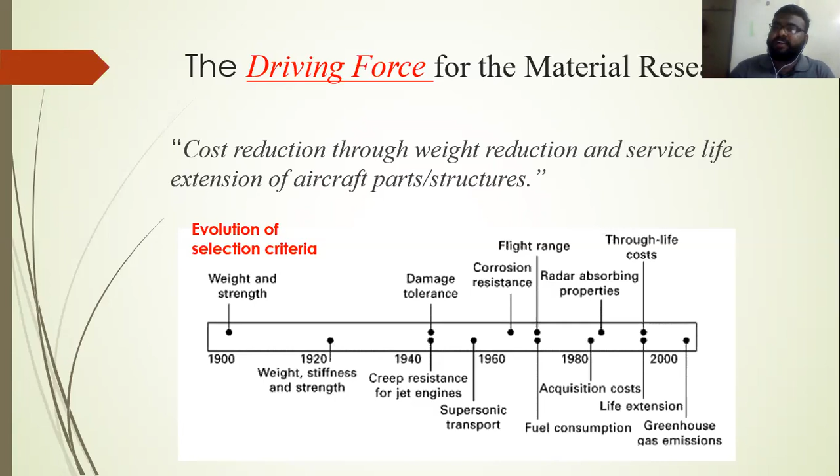So today's outline of the presentation is: we are going to see the importance of the material in several perspectives - the perspective of the environment, the perspective of the performance, the perspective of the design, or how the material is correlated. Later we are going to see the brief history.

So from when, right from the Wright brothers, what happened and what made them choose alloy, what made them choose the materials for their aircraft, and how it evolved from wood to right now Glare or CFRP being the lead material in manufacturing. That we'll see in the brief history.

Later we'll see the current scenario - what is happening right now, and what is a very happening material in the aerospace industries, and what makes them happening, or what made them an important alloy in the aerospace industry. That we will see in detail in the current scenario.

Later we'll see the future trends - what is going to be in aerospace materials, what are the interesting materials going to come for the aerospace industries, and what are the interesting characteristics also. That we'll see in the future trends.

And later the last topic we'll see is challenges or research scope in materials research. That is very important - what are the available challenges in the material which is currently in use. That we'll see in challenges or research scope. That will be very useful for young researchers or faculties who are going to start their research in materials. So this is my short outline of the presentation.

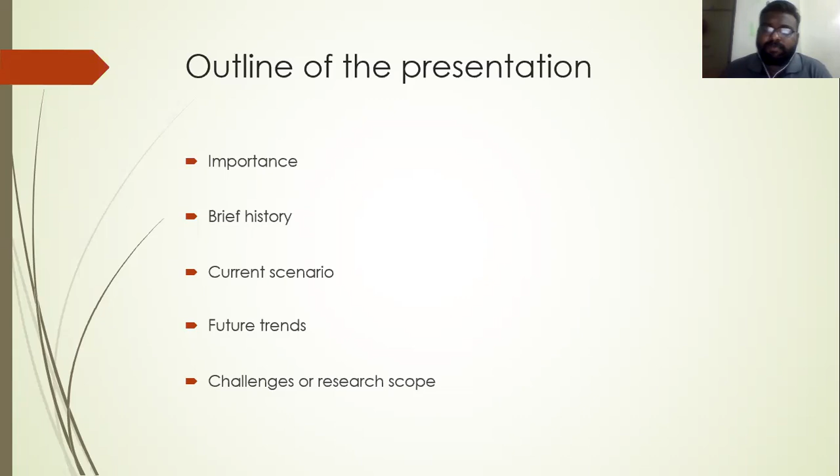As I said before, right now we'll see the importance of the material in the environmental aspect, or the perspective of the environment. As per the Intergovernmental Panel on Climate Change, a recent shocking report says by 2050, about 15% of the entire global greenhouse emission is going to be contributed by the aerospace industries alone. Just imagine, 15% is a big number.

Then we must feel responsible to reduce that number, because the material should be developed - a lighter material should be developed, a higher operating temperature should be developed - and in such a way we have to reduce this. For example, a reduction of 1000 kg may lead to 1.1 to 1.5 percentage reduction in fuel consumption. Just imagine - weight reduction plays a major role.

Similarly, by increasing the operating temperature of the current alloy in use by just 50 degrees C, we may end up increasing the efficiency by 1.0 to 1.3 percentage in engine efficiency. So the main tool to reduce this environmental effect is by reducing the weight as well as increasing the efficiency. Increasing the efficiency can be directly contributed by increasing the operating temperature of the material. So this is how material and environmental aspects are correlated.

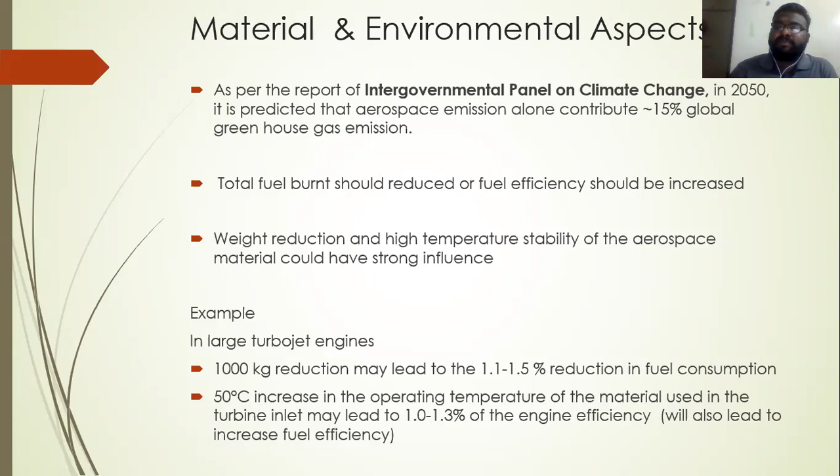Later we'll see material and performance. Obviously, material performance immediately brings the engine into picture, and if the engine comes into picture, thrust comes into picture. So the main criteria for increasing the thrust is one, weight reduction, as well as second, operating temperature - same thing we saw in environment, here also it matters a lot. So materials used in turbine blades should withstand high temperature, and obviously superalloys play a major role in this - nickel chromium superalloys play a major role in this.

Similarly, titanium is also used. There are two parts: one is the very high temperature part, and another is the cold part of the engine. In the cold part, where the operating temperature will not exceed 400 to 450 degrees C, titanium will be used, like for example the compressor blade. For the combustor, in that high temperature region, nickel superalloy can be used.

Similarly, single crystal alloys are happening right now in the turbine blades. A normal metallography microstructure of the material consists of grains and grain boundaries, and there will be several millions of grains and grain boundaries in a normal turbine blade.

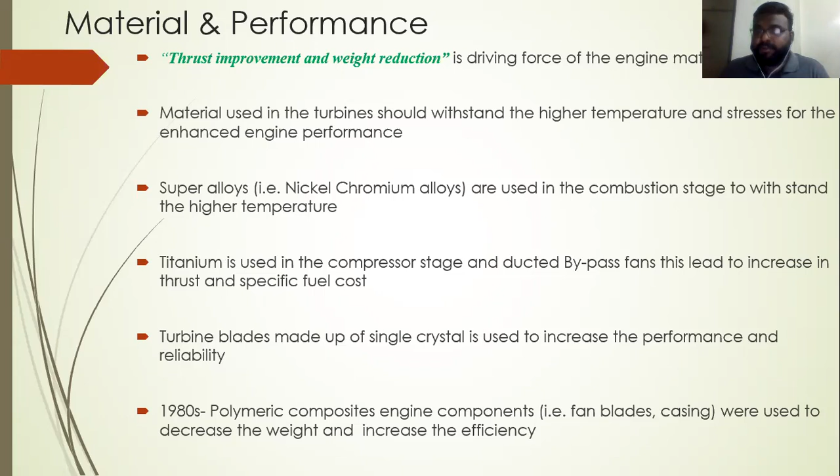Later, by the 1980s, polymeric composite engine components came into picture, and that decreases the weight and increases efficiency. Now, material and design - how are material and design correlated?

For example, if you want to design and develop a wing, you have to select a material which has both good tensile and compressive stresses. Just imagine, when an aircraft is taxiing or on the ground, the lower part of the wing will experience compressive stress due to the weight of the fuel and the cantilever effect - the wing bends towards the ground, so the bottom part has compressive stress. Similarly, during flight, the bottom part experiences lift, so the bottom part will experience more tensile stress, and the upper part will experience the vice versa.

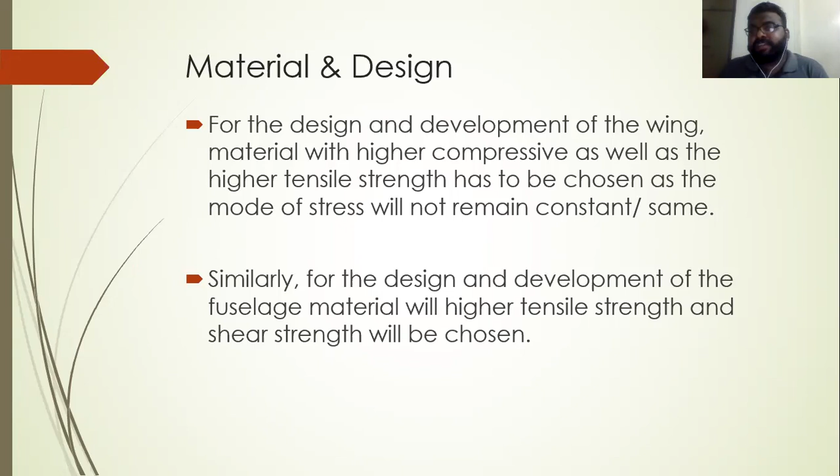So during the selection of the material, you have to keep in mind that the material should have both higher compressive and tensile stress. That's how material is also interrelated with design. Similarly, in the fuselage, the material should have higher tensile strength and shear strength, as well as really good fracture toughness. This is how material and design are correlated.

So let's see a brief history about the material. As I said before, by 1903, the Wright brothers used wood and fabric cloth because their engine capacity was very less - they could not afford steel or aluminum during that time because of the engine horsepower, so they used only wood and fabric cloth. By 1915, the Junkers J1, the first all-metal aircraft, was introduced, and the metal used here was steel.

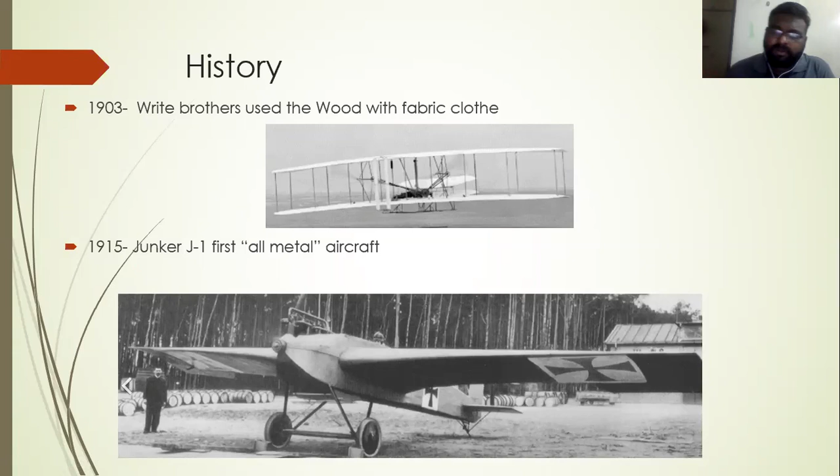Later, steel had a very important drawback: corrosion resistance. To overcome the corrosion resistance issue, the first de Havilland Comet, the first commercial jet airliner, used aluminum in a significant amount in 1949. Right from that time, aluminum has become a major material in the aerospace industry.

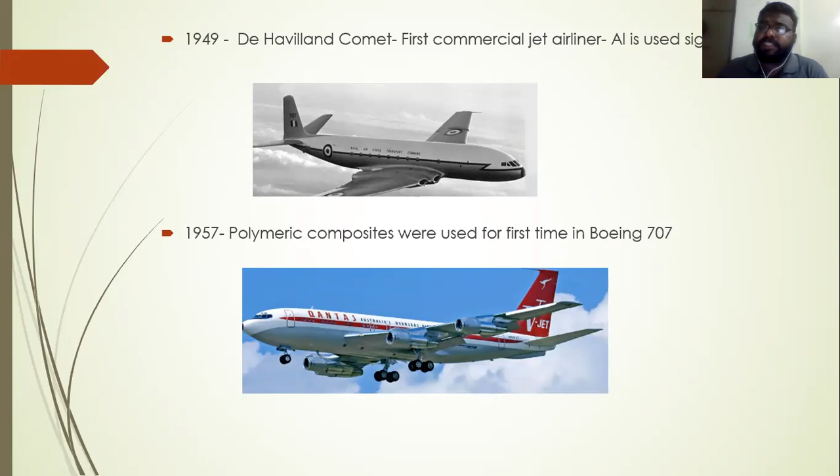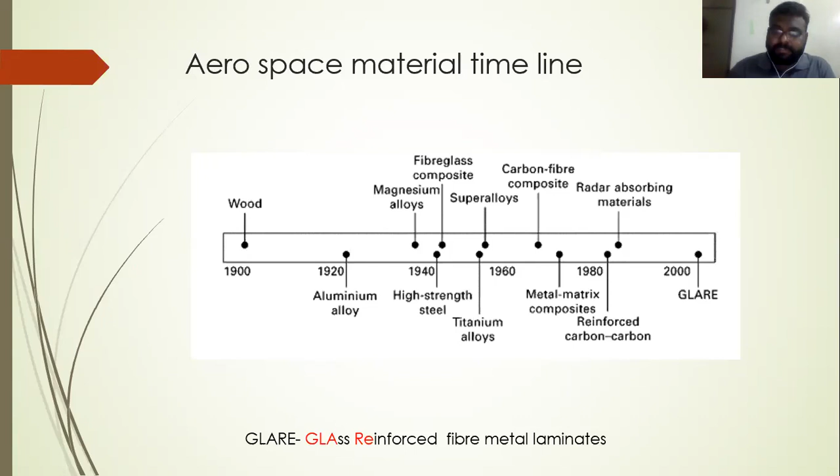So this is the current scenario, what you're going to see now. Current scenario is nothing but composite material. Just by seeing this one graph, you can clearly understand how composites have gradually increased and reached the top right now. For example, in Boeing 747, it's less than 10% composites - maybe around 4 to 5%.

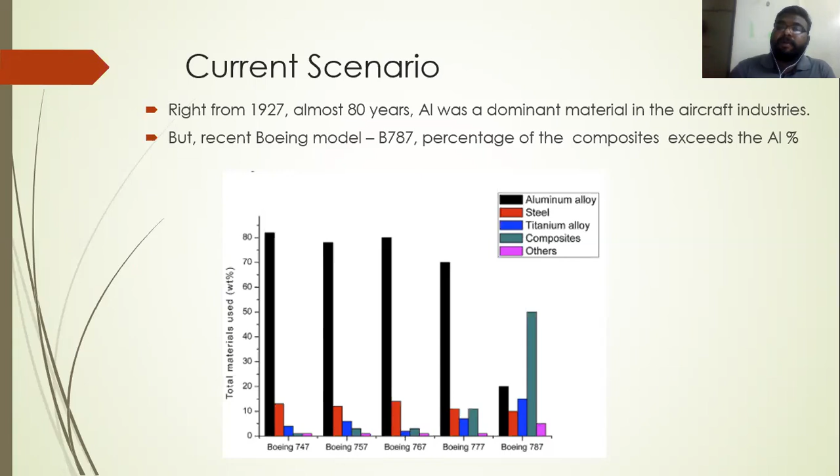But right now in Boeing 787, a recent vehicle launched by Boeing, also called Dreamliner, it's about 50% composites - it's made up of composites. And similarly, you can see the aluminum, how this is dropping. Right from the Boeing 747, the percentage of aluminum is dropping, and right now composites are happening and are a very important component, a very important material, for the aerospace industries. So this is also another solid evidence for that.

Right from the DC-9 in 1965, composites have been in practice - they've been using it, but it's gradually increasing, and it has reached right now in Boeing 787 and the Airbus A350 in 2018. By 2018, the Airbus A350 used about 50% composites.

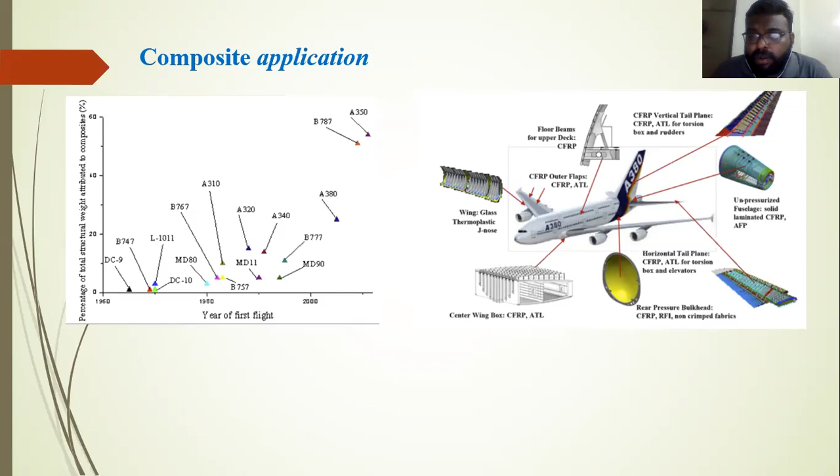Some important components made of composites are CFRP outer flaps, CFRP vertical tail planes, and horizontal tail planes, which are made up of CFRP, ATL for torsion box, and elevators. So these are all important components made of composite materials - one solid evidence for the increase in composite applications in the current scenario.

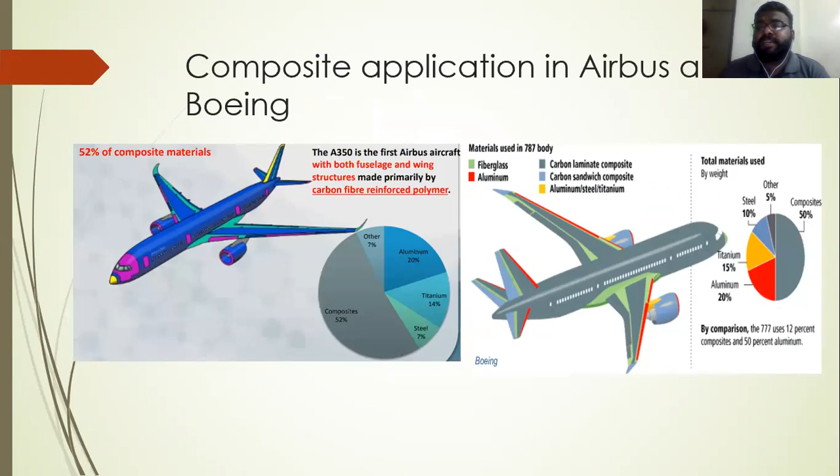For example, in the A350, about 52% composites are used, which is Airbus 350. And in the Boeing 787 Dreamliner aircraft, about 50% composites are used. So this increase in composites is mainly attributed to what makes it more important and causes this drastic increase in composite application.

First thing is higher specific strength. Second is higher corrosion resistance, and third is fatigue resistance - it has very good fatigue resistance. Fourth is higher operating temperature. I'll give some numbers to highlight the importance.

For example, CFRP - nothing but carbon fiber reinforced polymers - has 550 MPa yield strength. It has about 1/5 of steel's density and 1/3 of aluminum's. Just imagine how light it is. Such a light alloy, but it has a yield strength of 550 MPa - just imagine what a great boon it is for the aerospace industry. That's why CFRP plays a major role in the Airbus A380 and in fuselage construction.

Similarly, CMC, ceramic matrix composites, are an excellent candidate for high temperature applications, so it can be used as is for combustion - we don't want to go for any special coating. You can try using it directly for combustor application because it can withstand up to 1400 degrees C, and combustor temperature may be between 1250 to 1300 degrees C. So if it can withstand 1400 degrees C, you can also apply a thermal barrier coating to extend the safe limit and design safety further, and we can use it.

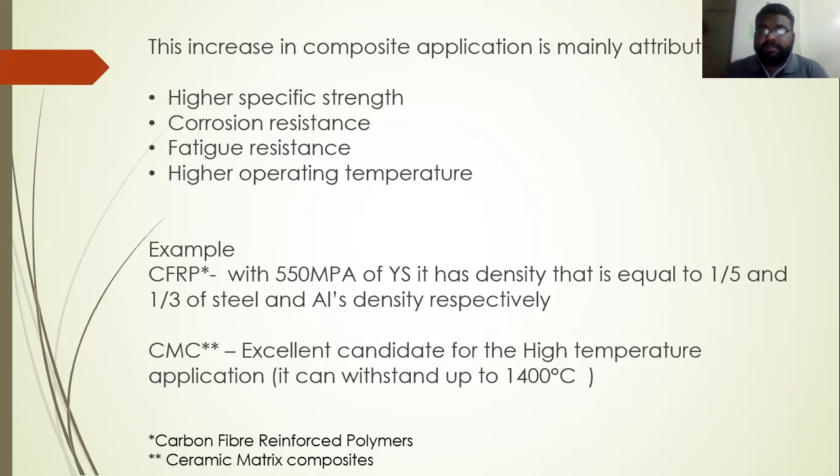CMC is also another tool for enhancing the performance of the engine. Not only composites, but even aluminum is under research right now, working on 2000 series and 7000 series. 2000 series is aluminum-copper alloy, and 7000 series is aluminum-zinc alloy. Aluminum lithium is also under investigation currently. Aluminum lithium is the lightest alloy among the aluminum group, because lithium has a tendency to reduce the density of aluminum, so the end product gets a much lighter role.

Titanium is another important material which has consistently increased its application in the aerospace industry. There's one solid proof for that: in the Boeing 727 in the 1960s, just 1% of titanium was used in the entire aircraft, as a percentage of the operating empty weight. But right now, in the Boeing 787, it's about 18%. It's not a big number like composites at 50% or 52%, 30 or 40%, but even though it's a small increase, there's a consistent increase in the application of titanium. That consistent increase is mainly attributed to its higher specific strength.

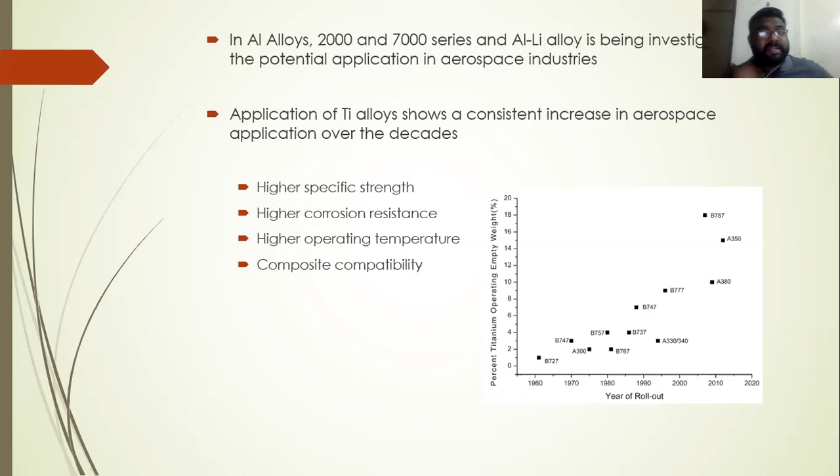Similarly, we are going to see some important and interesting candidates in the future trends of aerospace. One is self-cleaning polymers. We all know about the lotus leaf - if you have a droplet of water on it, it won't stick together. It will behave like mercury, moving here and there and coming out. This is because it has a hydrophobic character. In biomedical fields, they talk about hydrophilic and hydrophobic properties in relation to osteogenesis.

Similarly, it has a hydrophobic character. By using the same operating principle or theory, material can be developed that can self-clean itself. If you pour water on it, only dirt will be removed, but the water will not stick onto it. Such an operating principle is adopted to develop fabric seats and carpets for aircraft. This is called self-cleaning polymers, which is under research and might be used in future aerospace industries.

Similarly, self-healing is another important one - this involves polymers, ceramic, and metal matrix composites that can repair themselves. In a composite, if there's a crack initiated which is not visible to inspection, failure will happen, and that failure might be hazardous or fatal. So where the crack initiates and propagates, during the composite buildup itself, we have a healing material as well as a triggering material together in the mixture. Once the crack reaches the healing material, it gets released, and the triggering material causes polymerization to occur again, so the material self-heals.

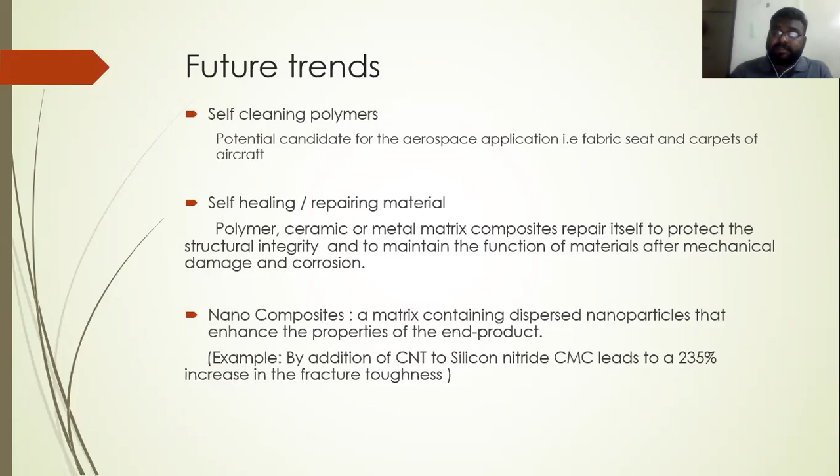Okay, so let's see the scope for research in aerospace materials. We've seen the driving force, the important driving force for materials research. Right now we'll go much deeper and more focused. We'll see what areas and challenges in aerospace industries and aerospace materials can be developed.

That can be taken under serious consideration for research. First is insufficient mechanical performance. That is a very important thing which has to be dealt with very seriously. Second is fretting wear, the upcoming very important problem in engine components. Fretting wear is nothing but where the relative motion doesn't exceed 100 microns.

A very small vibration kind of relative motion between the components will create fretting debris, the wear resultant, and that debris will not even escape from that relative motion contact. So it remains in between this small relative motion, and that will create a crack, and that crack will lead to fatigue failure also, which is called fretting fatigue. That is very insidious and hazardous, and a lot of engines have failed during flight itself due to this kind of problem. So that has to be addressed properly.

And the third one is stress corrosion cracking, another important failure. Stress and corrosion act together and can promote each other. For example, if the stress is high and corrosion is also happening, that stress will enhance the corrosion, and the cracking pace will be increased. So stress corrosion cracking is very important, and that has to be addressed.

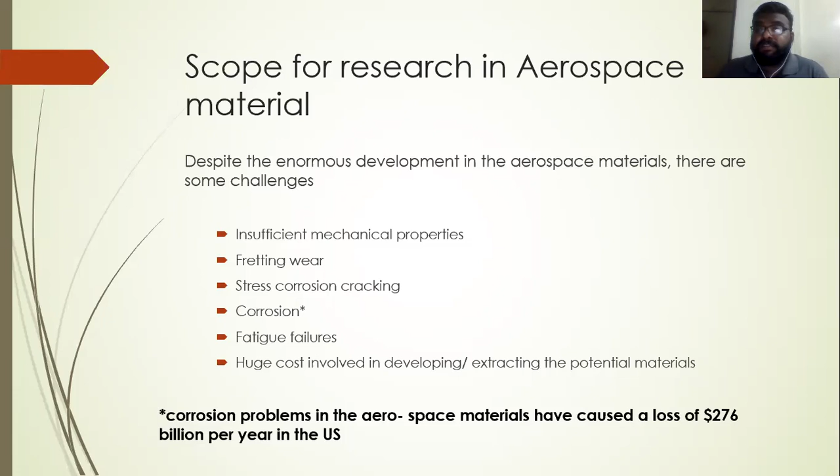And then there's the huge cost involved in developing or extracting the potential material. No doubt, an important material where huge cost is involved in extraction is titanium. Titanium has very good properties, and the application of titanium is mainly constrained due to its extraction cost, which is several times, about 5 times, higher than steel. So if people are working on reducing the extraction cost of titanium, that's a great area of research, still prevailing, still being worked on.

So we'll see material by material, what problem each material has, and what could be the possible solution for the problem. Let's see. The first thing is aluminum alloy, the lightest possible alloy. There's no doubt in it.

About 14% weight reduction can be achieved by replacing conventional alloy with aluminum lithium alloy. Even among aluminum alloys, aluminum lithium alloy is the lightest one. Almost 14% reduction in weight can be achieved by replacing conventional alloy with aluminum lithium. However, this alloy has less corrosion resistance and anisotropy issues. So people can start working on this issue, and that will be a good chance for a good research outcome.

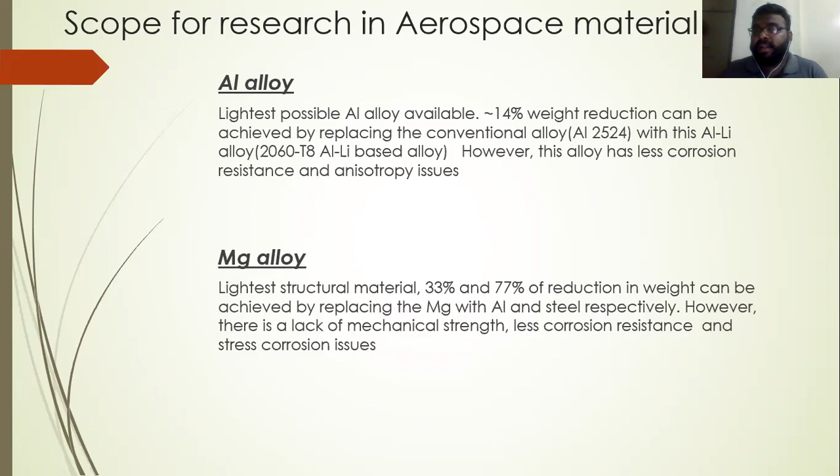And then magnesium alloys. Magnesium alloy is the lightest structural material. About 33% and 77% reduction in weight can be achieved by replacing aluminum and steel with magnesium respectively. Just imagine, it's 33% lighter than aluminum and 77% lighter than steel. But the mechanical strength of magnesium alloy is very low, and similarly the corrosion resistance is also very low. So people should work on enhancing the mechanical strength, corrosion resistance, and stress corrosion resistance.

Similarly, titanium alloys. Let me highlight one important parameter for titanium alloy applications. In the A380 aircraft, just by replacing steel with titanium, a weight reduction of 5,750 kgs can be achieved. That in turn saves us 288 liters of fuel per hour. Just imagine how much this contributes to fuel consumption.

But basically, titanium is divided into three important categories: alpha alloy, beta alloy, and alpha plus beta alloy, based on the alloying element added to the titanium. Alpha alloy has inferior high temperature capability, while beta alloy has higher strength but inferior tensile ductility, which has to be enhanced. Alpha plus beta alloy makes up almost 70% of US titanium production.

Ti-6 aluminum-4 vanadium, that very famous titanium alloy, comes under this category, and about 50% of titanium production belongs to it. So that's how important it is. However, it has lower hardness, so research like heat treatment or surface engineering has to be proposed to increase its hardness. That is a research scope in this area.

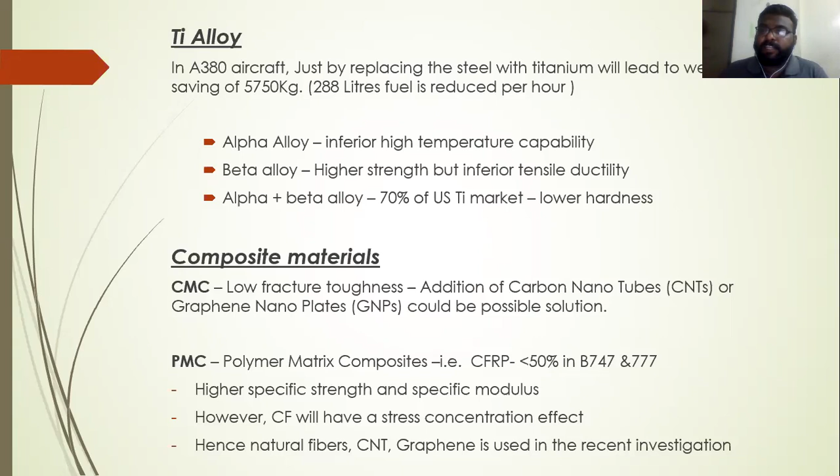In steel, we have a few more alloys to discuss. Steel is a conventional material used in aircraft from the earlier days. As I said, all-metal aircraft came in around 1917, with the J1 aircraft which we saw in the previous slide. Right from that time, steel has been in use, with gears, carriages, and fasteners being components conventionally made of steel. But the very important drawback in steel is its lower specific strength and corrosion resistance.

In order to overcome this lower specific strength and corrosion resistance, there are several researches going on, and possible solutions are low alloy steel, which is currently under research, and nano steels, being developed to address these issues.

Similarly, nickel-based superalloy. As I mentioned, we are talking about increasing the operating temperature of the material, and this is one of the important materials which can be used for enhancing the performance of engines. But this alloy also has a problem, which is high temperature oxidation, since it is exposed to high temperature, making the material prone to it. This problem should be addressed.

Currently, people are adding chromium or aluminum to this superalloy in order to increase its resistance towards high temperature oxidation. Chromium is also found to be a potential element to enhance the stress rupture life of the nickel-based superalloy. So by alloying, this problem could be addressed effectively.

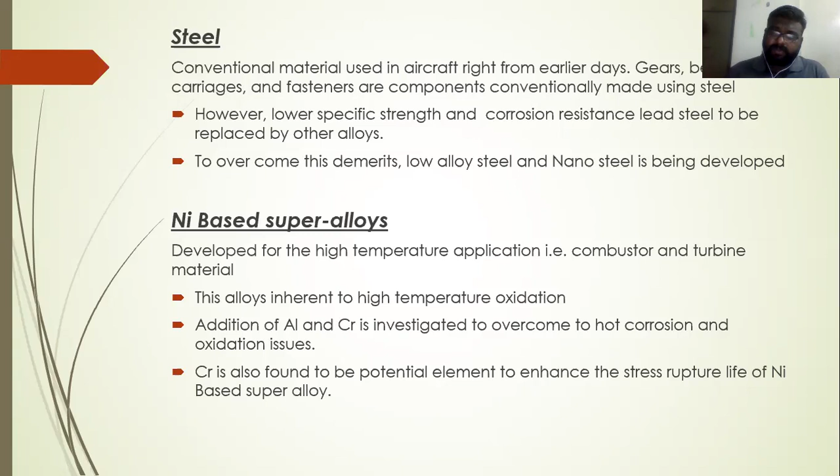Thanks a lot for your time. I hope I've given some insights about materials research, and some insights about the history, current trends, and future trends, and even research scope in material science. Thanks a lot for your time, and thanks a lot to the organizing committee for this opportunity. Thank you.